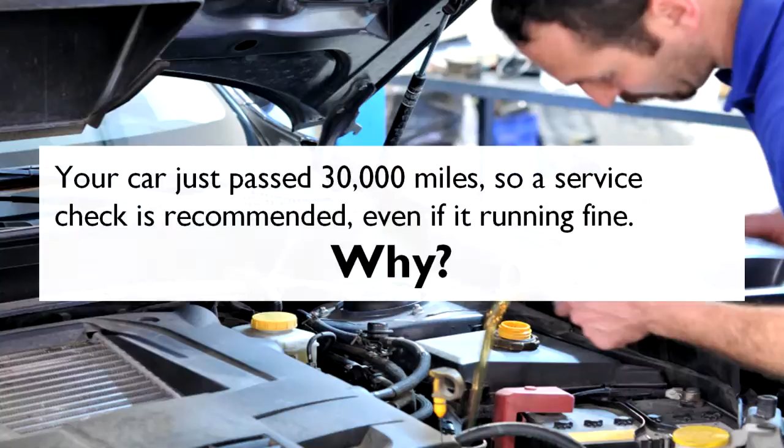Now, let's talk back about your car. Your car just passed 30,000 miles. So a service check is recommended, even if it's running fine. Why? It's to prevent problems, to check it out.

Does everybody do their service checks on their cars? Probably if it's covered by warranty you do, but as soon as warranty's out, what happens? You stop. Typically. Not everybody does. Okay? So we want to make sure that we check the operation out.

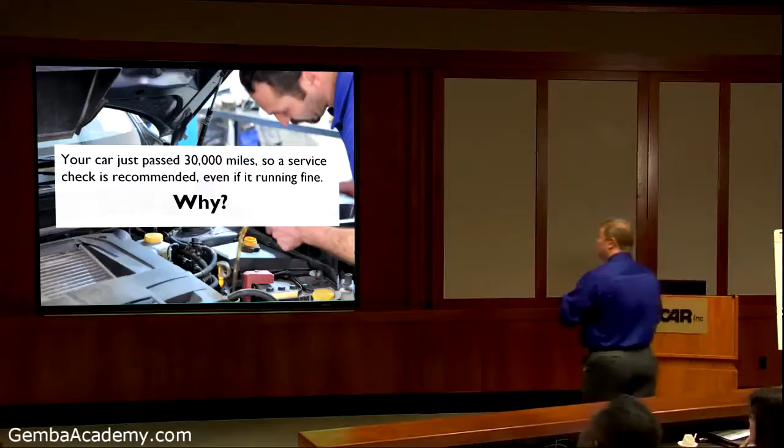Now, how many people have to get to work in the morning on time? What happens if you didn't do the check on your vehicle and it broke down? Is that an inconvenient time for it to break down? What if you're going to the airport to catch a flight out? Is that an inconvenient time? Going to a soccer game on Saturday? Is that an inconvenient time?

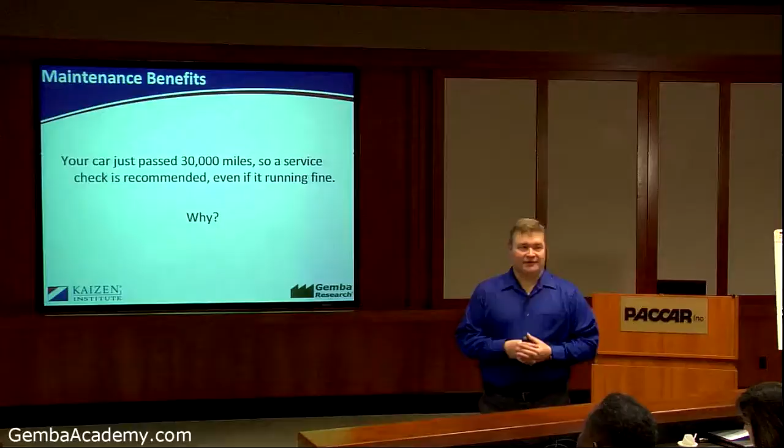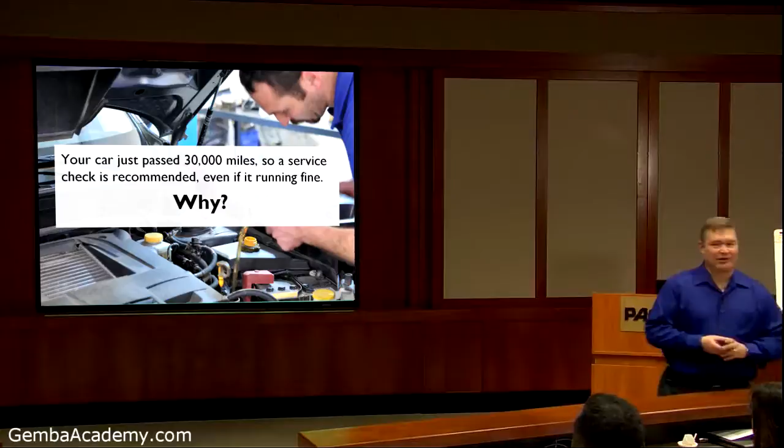Usually what happens is if we don't maintain our piece of equipment, the breakdown will happen at an inconvenient time. Right? So let's prevent that. So we want to set up systems where we don't have that. So we want to check. It's also a pay me now or pay me later. Typically it's pay me more later is what happens.

If you have a major pump repair, if you have an unplanned, it probably takes you about 200 hours as an example of downtime. It'll cost about $60,000 to replace it, usually 10 times the normal cost. Why? Because you have overtime, you have to expedite it, you got some shipping, you can lose production, you got outside help that comes in. There's all things that you have to do to firefight to get things done fast.

If you didn't have to do that, maybe it would only take you 72 hours of planned downtime, and you would have had things planned up front that could have cost you less, maybe $6,000. Those are just figures as an example. But you can do the simple math that any time that I can plan something, it's going to be cheaper than if it was a reaction to something that happened at an inconvenient time. So the point is, how can we prevent those inconvenient times happening?

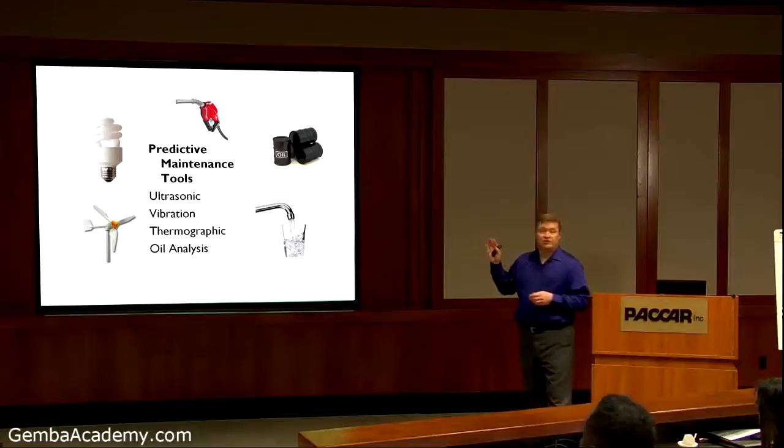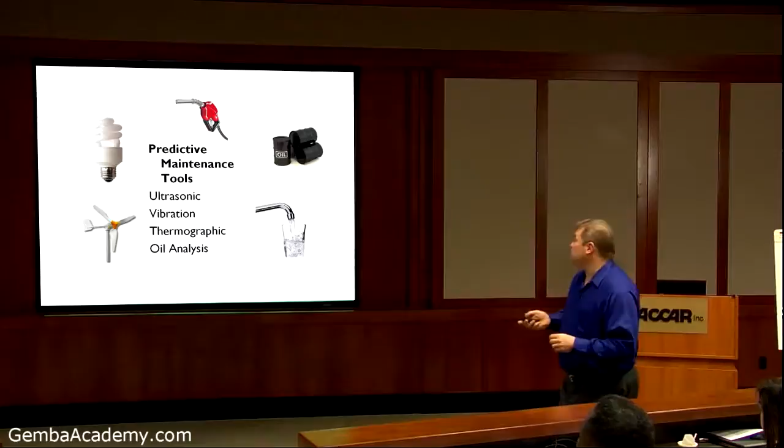It also can save us energy. You can go into some super equipment, and this is something when you get further along in the TPM to start looking at prevention, investing in things like ultrasonic equipment, vibration equipment, thermographic, and oil analysis. Let's take oil analysis as one. Just like you change the oil in your car, what do they tell us? Change your oil every 3,000 miles or 3 months, right? It's in the manual. Why do they tell you to do that?

History. Okay. Neither one is the best way to do it. The best way to do it is look at the oil itself. The oil will tell you, does it need to be changed or not? Okay? So it may be 6,000 miles, not 3,000 miles. So they're using that to ensure that you can change the oil without checking it. We may do that in our equipment.

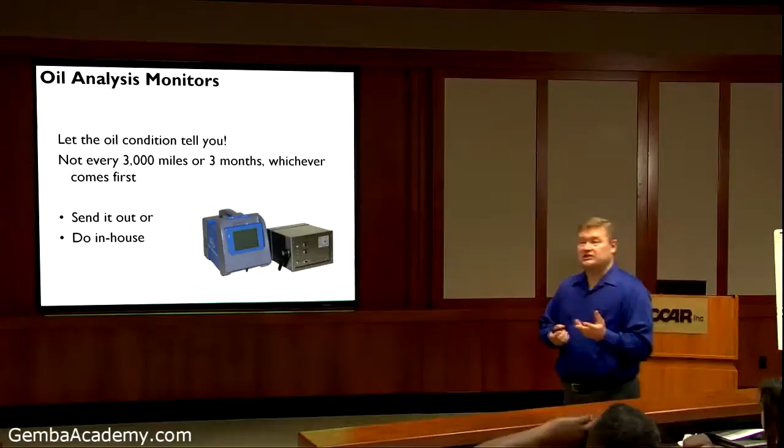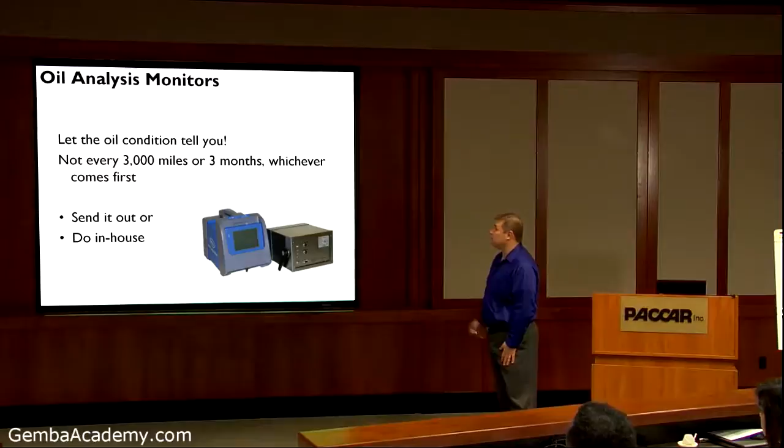How many people say we're going to change that every 6 months? Or we're going to change that every so many hours of production? It's typically how maintenance has it set up. What you may want to look at is how can I analyze my oil, either send it out to be analyzed or do it in-house. That way I can check the oil condition and it can tell me when it really needs to be changed. Saves you time on changing the oil and saves you time on making sure that it doesn't wear out prematurely.

Now let's talk about maintenance heaven. If you're thinking about maintenance heaven, what would be heaven to a maintenance person?

This is a family channel. Okay?

Okay. Yeah, 0 breakdowns. That would be good, right? You'd be in heaven if you had 0 breakdowns. You didn't have any setups or adjustments to worry about on any pieces of equipment. That'd be heaven. You had no small stops, little interruptions, little hiccups that you got to run out and go fix this lever. No speed losses.

By speed loss, what I mean is the machine's old and we can't run it full out. Let's back it down about 80%, maybe 60%, because we don't want to push it too hard. So that's a speed loss. We have to slow the machine down because it can't handle running at what it's meant to.

Startup rejections. Yeah, we got the machine set up, but we got to do a lot of adjustments to get a good piece out. So all those adjustment periods. Any product defects that happen because the machine doesn't hold the variability that it should hold. So our tolerances are too tight and the machine's not capable of running those tolerances.

So we got a lot of rejects. So I would consider those the big major losses. Those are the 6 major losses that we look at, and if we didn't have those, we would be in maintenance heaven. Would you agree? Okay. So when we look at those 6 major losses, we can actually measure them with something called OEE. And what we're going to look at is how those losses affect our production.

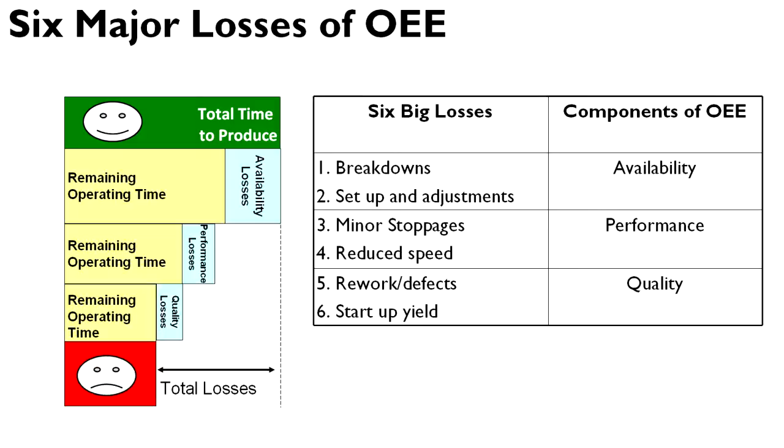So if you take all those losses during the day, you see how much time our machine is actually available, running at top speed and running good quality parts. What percent of time is our machine running that way? We want to make that a larger percentage of the day than it currently is.

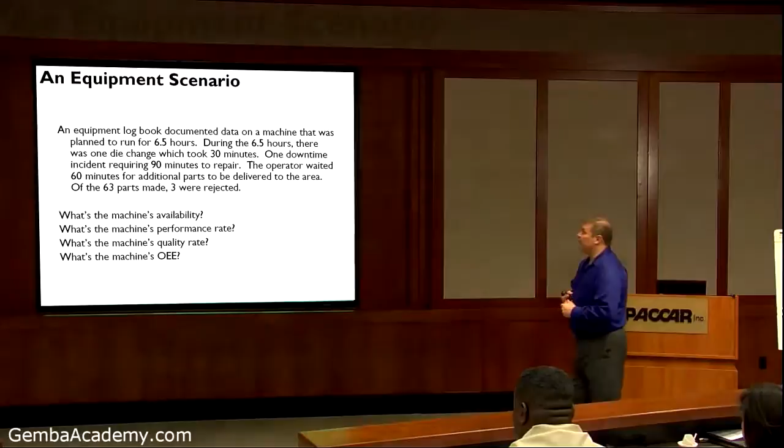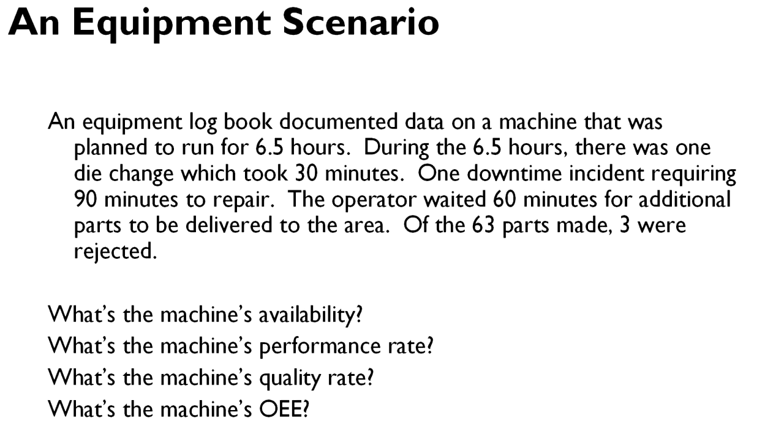Okay? So here's a piece of equipment. The logbook says it should run for 6.5 hours. During those 6.5 hours, there was one die change that took 30 minutes. One downtime incident took 90 minutes to repair. The operator had to wait 60 minutes for additional parts to be delivered. There were 63 parts made, but 3 were rejected. So based on what we just talked about, we can measure the availability of that machine, the performance rate, the quality rate, and then the OEE.

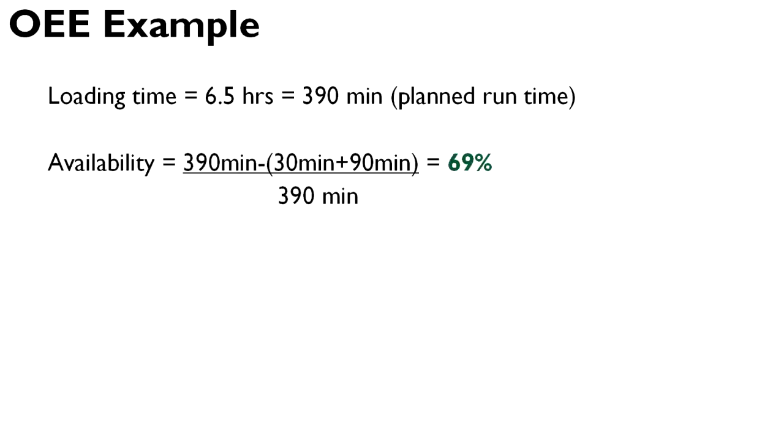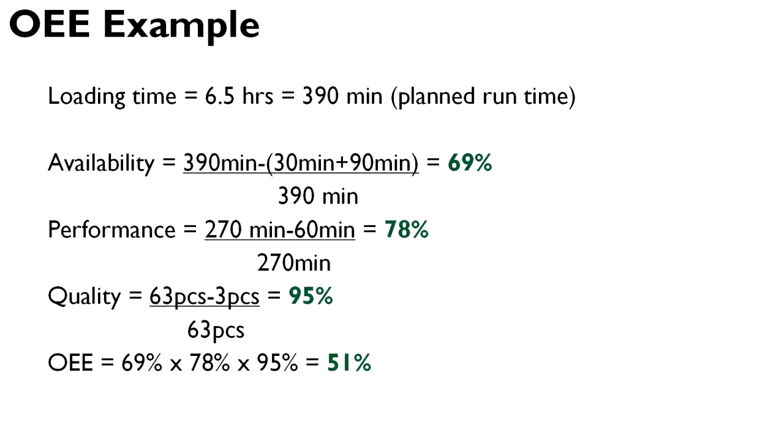So our OEE is basically doing the math. We took our load time of 6.5 hours, which is 390 minutes, and subtracted the die change and the 90-minute stop. Dividing that out, it's 69% available. So with the losses of the setup and the breakdown, 69%. Performance was down to 78%, and the quality was 95%. Multiply those 3 together, 69 times 78 times 95, and that gives you 51% OEE. Overall equipment effectiveness.

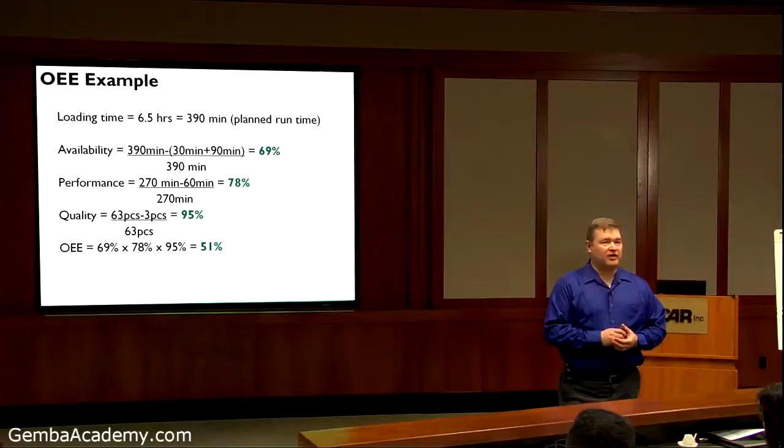Now, a lot of times we want to measure how effective our equipment is, so we institute a measure on our pieces of equipment. Usually when you first start a TPM program, you don't know how effective your equipment is, so you don't have this metric. It's a good metric to start with so everybody understands where our losses are coming from and what we can do about it. As you get really good, you may not need this metric anymore, but it's a good one to start with so everybody understands what's keeping our machines from running full out.

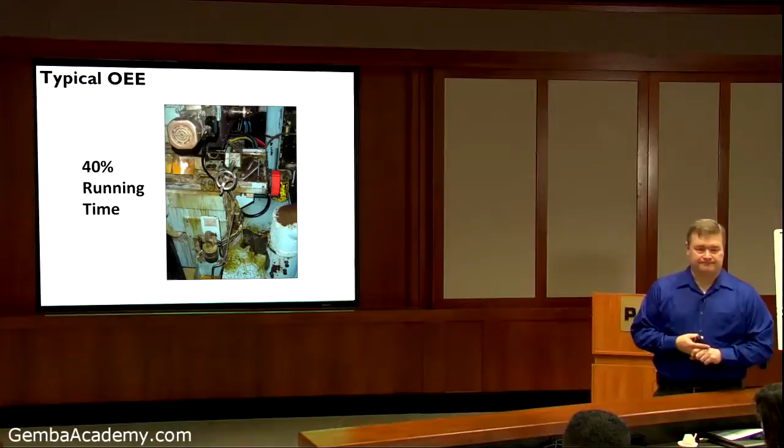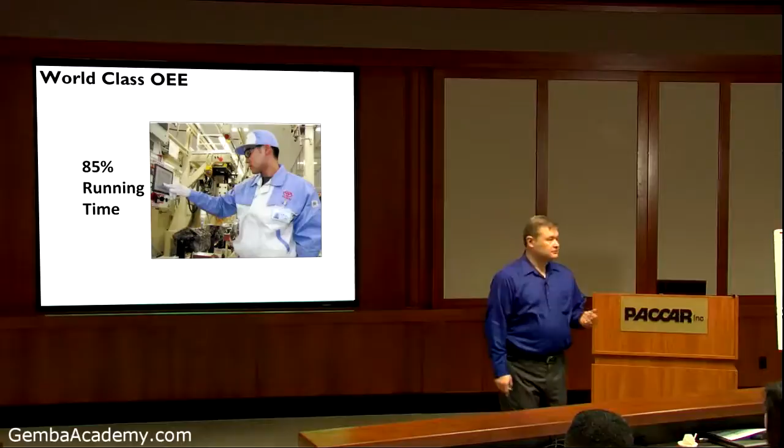Typically in the US, it's about a 40% running time. So 40% of the time, you would expect our machines to be running if you did a true OEE on your equipment. So what's world class? World class is 85%. If you're at an 85% level, that's pretty much world class. Of course, we want to move it toward 100. Now, what happens if you have 120% OEE? Fix your standards. Exactly correct.

We had that example happen to us. We had an OEE of 120%. When we looked at each of the elements, we found that the standards set for the machine were too low. They had changed some of the tooling and improved the productivity, but never changed the standards. So they were kicking butt on productivity. They were still terrible on the other stuff, but they were so productive when it was running that it had 120%.

So what did we do? Change the standards to reflect what it should be running. And then the OEE was back down. So you may run across that. But when you did the measures, you saw that problem. Even though people knew about it, they didn't figure it out until they did the OEE and said, oh, we should change that. We should fix that.

So every time you improve it, you're going to change the standard? No, that was just an example where we had changed some tooling to improve productivity, and it was reflected in the OEE. But you would do this metric, see where your losses are, and concentrate your focus on the biggest losses.